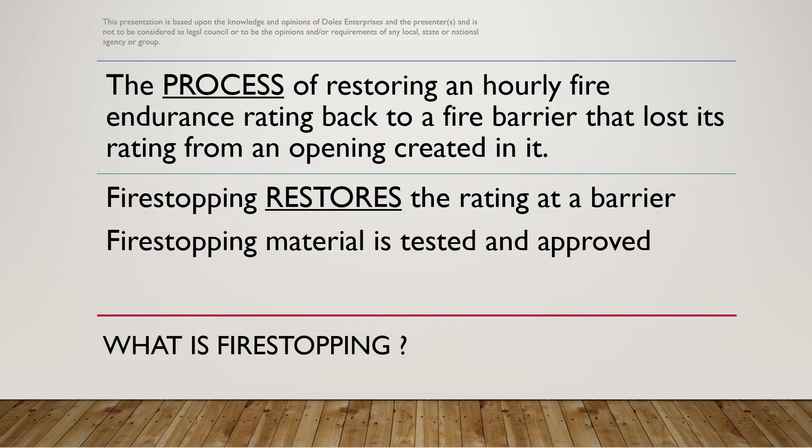The building codes have very clear requirements on passive fire protection. Fire investigative reports have shown that unprotected or improperly protected penetrations and joints cause millions of dollars in property damage and contributed to the loss of life and injuries due to the uncontrolled migration of fire, smoke, and gases. In order to promote life safety and property protection, the National Building Codes include fire testing and performance requirements for

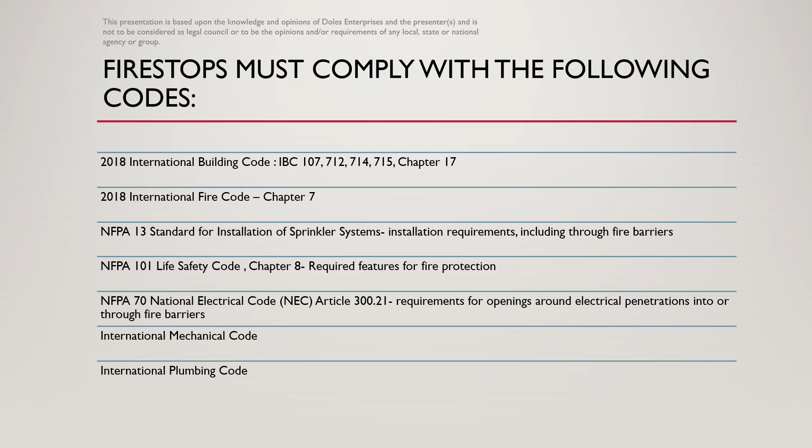penetration fire stop and fire-resistant joint systems and rated duct systems. Chapter 7 of the International Building Code provides detailed requirements for fire resistance rated construction, including structural members, walls, partitions, and horizontal assemblies. Other portions of the code describe where certain fire resistance rated elements are required. The chapter specifies how these elements are constructed, how openings in walls and partitions are protected, and how penetrations of such elements are protected.

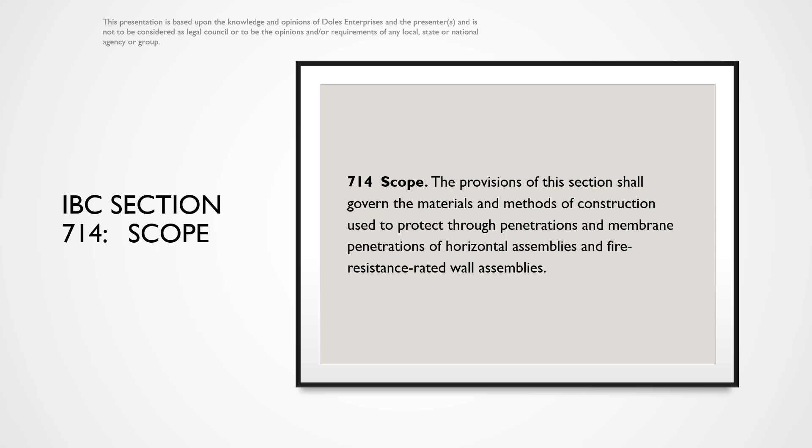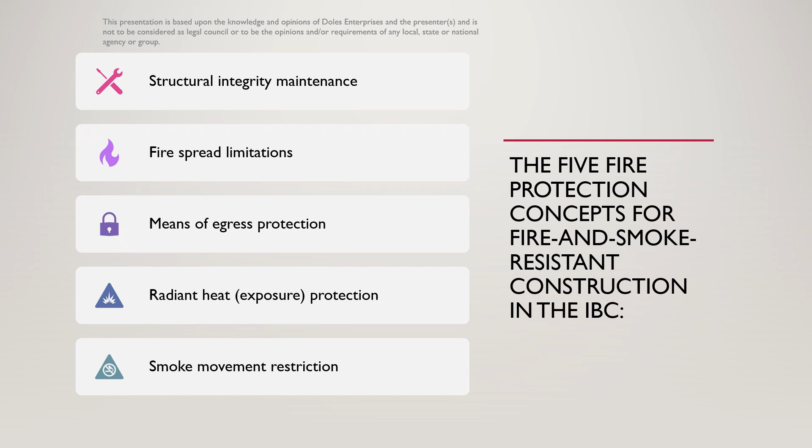The 5 fire protection concepts for fire and smoke resistance rated construction in the IBC are: structural integrity maintenance, fire spread limitations, means of egress protection, radiant heat exposure protection, and smoke movement restriction.

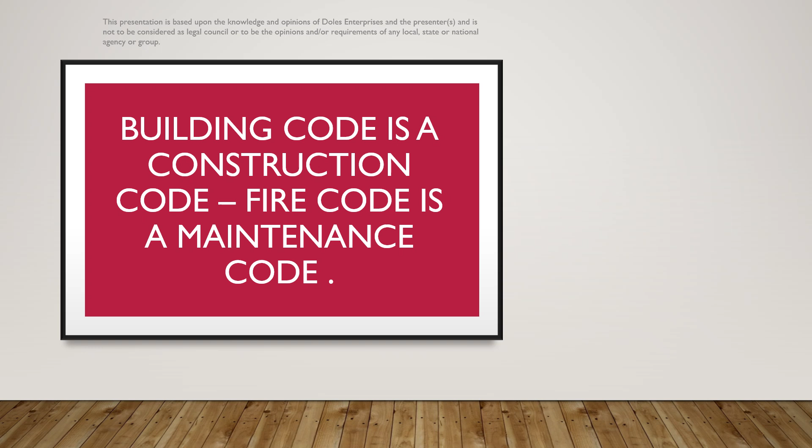Building codes control and include fire safe design and fire prevention into the construction of the building and systems that are installed. Fire codes dictate prevention on an ongoing basis beyond the period of initial design and construction. It can best be said that the building code is a construction code. The fire code is a maintenance code.

Referencing Chapter 7 of the 2018 International Fire Code, Chapter 7 provides requirements to maintain the fire resistance ratings of building elements and to limit fire spread. In 701.6, Owner's Responsibility, we read: the owner shall maintain an inventory of all required fire-resistant rated construction installed to resist the passage of smoke, and the construction included in sections 703 through 707.

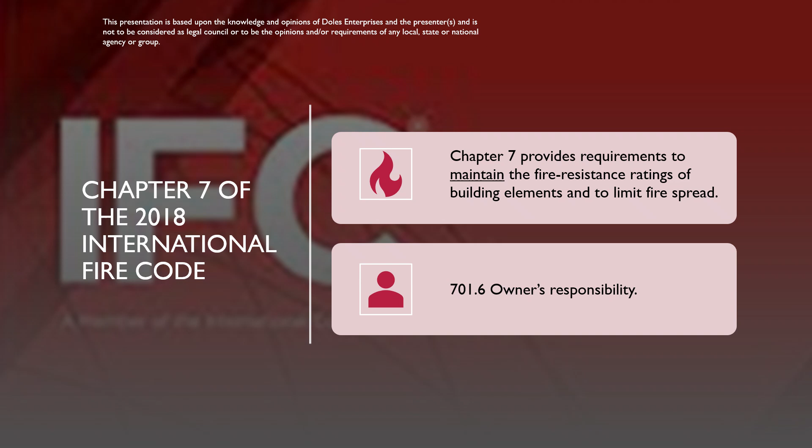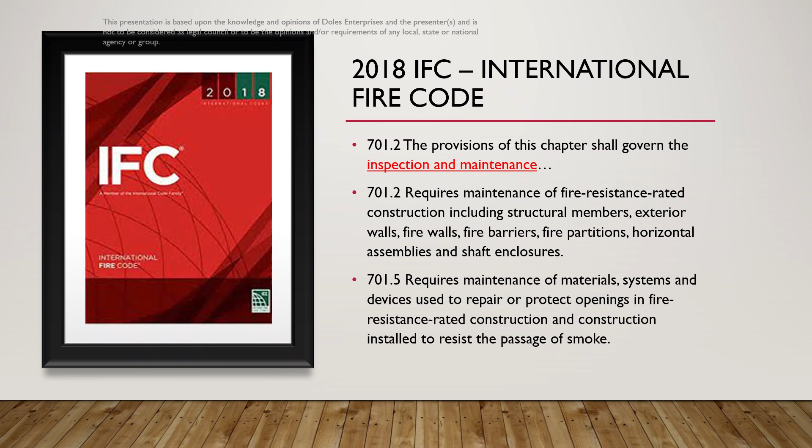Such construction shall be visually inspected by the owner annually and properly repaired, restored, or replaced where damaged, altered, breached, or penetrated. Again, referencing the IFC in 701.2, the provisions of this chapter shall govern the inspection and maintenance. Therefore, we make the statement that the fire code is a maintenance code.

Fire stopping is critically important in healthcare facilities because many occupants have limited mobility and could not easily evacuate in the event of a fire. Hospitals and other healthcare facilities that perform surgery or offer inpatient care are designed to protect occupants by a process called defend in place. By contrast, most occupants of an office building can evacuate themselves without assistance, thus the higher standard for healthcare facilities.

Healthcare facilities must be designed with additional features that protect the occupants in the event of a fire. The Joint Commission and the Centers for Medicare and Medicaid Services, the two primary agencies that regulate hospitals and healthcare facilities, require that buildings comply with the National Fire Protection Association Life Safety Code, NFPA 101, and the associated life safety chapters. Many healthcare facilities initiate a barrier management program, restricting access above ceilings to prevent unknown breaches in fire barriers. Barrier management programs are discussed in more detail in another section.

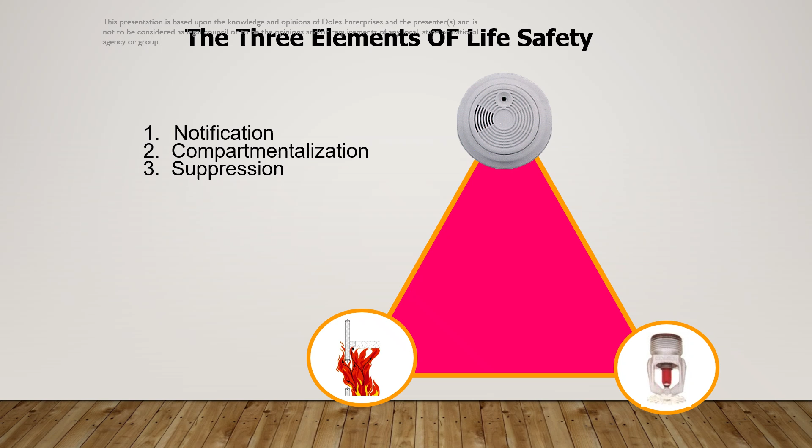National fire protection groups throughout the country have identified these 3 elements of fire and life safety: number 1, notification; 2, compartmentalization; 3, suppression.

The containment of smoke and other toxic gases during a fire is a crucial element in fire and life safety. Compartmentation is identified as a passive fire protection measure. The spread of fire can be restricted by dividing a building into separate compartments with fire-resisting walls and floors, thereby increasing the availability of escape routes for the occupants.

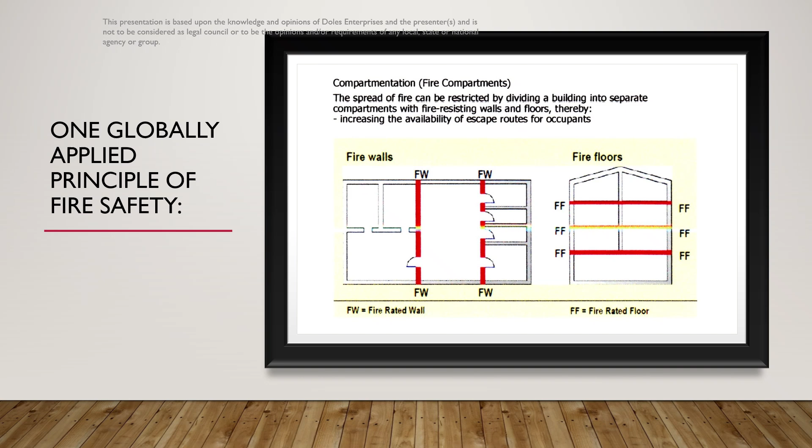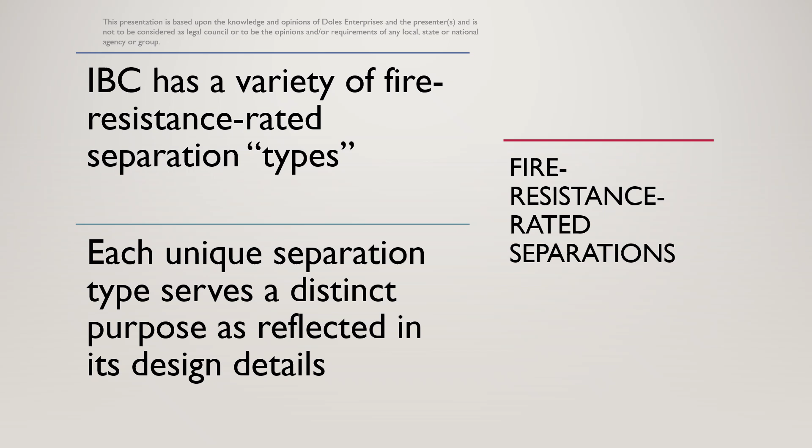The IBC lists a variety of fire resistance rated separation types. Each unique separation type serves a distinct purpose as reflected in its design detail. Fire resistance rated separations listed in the IBC include firewalls, fire barriers, fire partitions, smoke barriers, exterior walls, and horizontal assemblies.

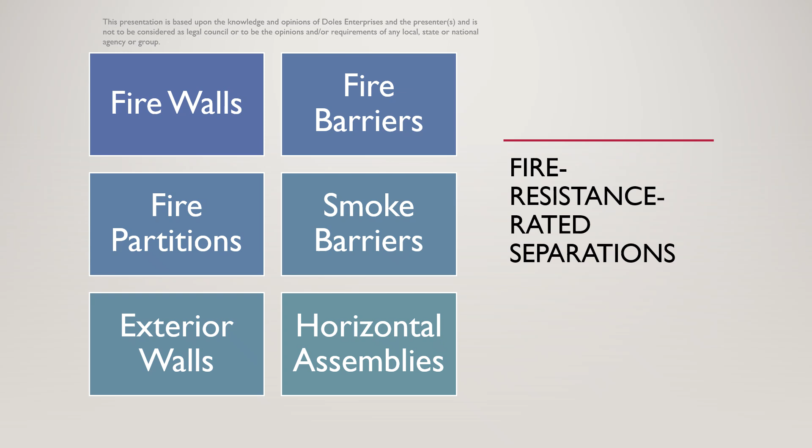Fire protection systems can be broken down into two prime categories, active and passive. An active fire suppression system includes mechanical systems that are designed to extinguish fires after they have been started, such as sprinklers. But active systems do not control propagation of smoke and gases, the leading cause of death in fires.

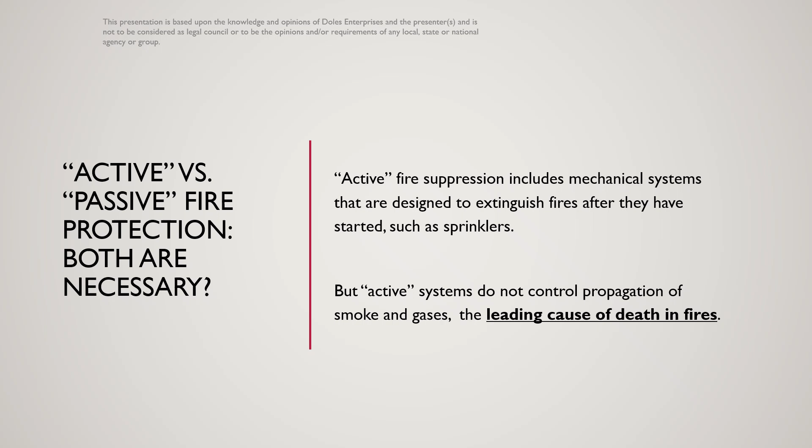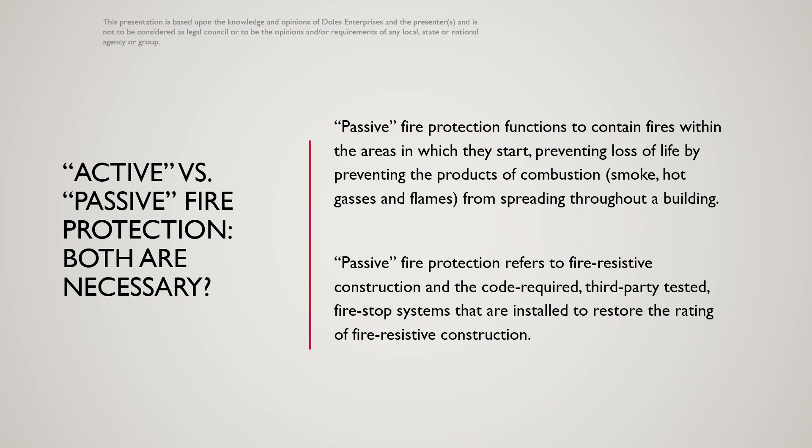Passive fire protection functions to contain fires within the area in which they start, preventing loss of life by preventing the products of combustion, smoke, hot gases, and flames from spreading throughout a building. Passive fire protection refers to fire-resistant construction and the code-required, third-party tested firestop systems installed to restore the rating of fire-resistant construction. These systems are an important part of a comprehensive, balanced approach to fire protection.

Passive fire protection focuses on containment and uses compartmentalization to prevent or slow the spread of fire from one compartment to another. Fire stops have been receiving more attention in recent years, especially from building inspectors and fire marshals. This is not surprising. Statistics show that inhalation of smoke and toxic gases accounts for 75% of all fire-related deaths, and about 57% of people killed in fires were not in the room of the fire's origin, underscoring the importance of good containment, which can only be achieved with properly installed and maintained fire-stopping systems.

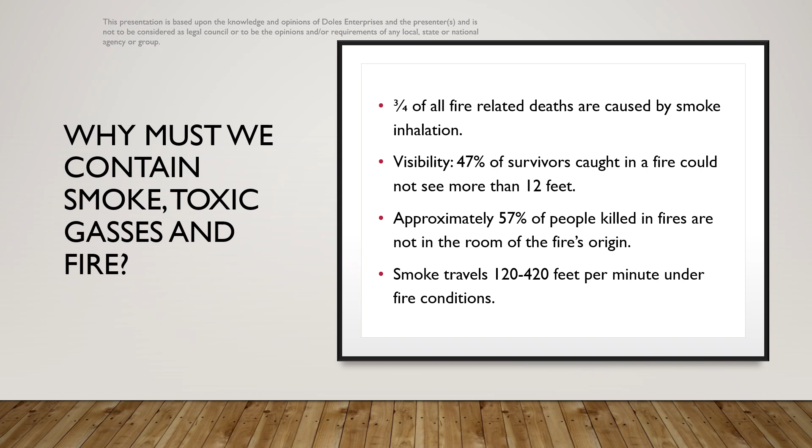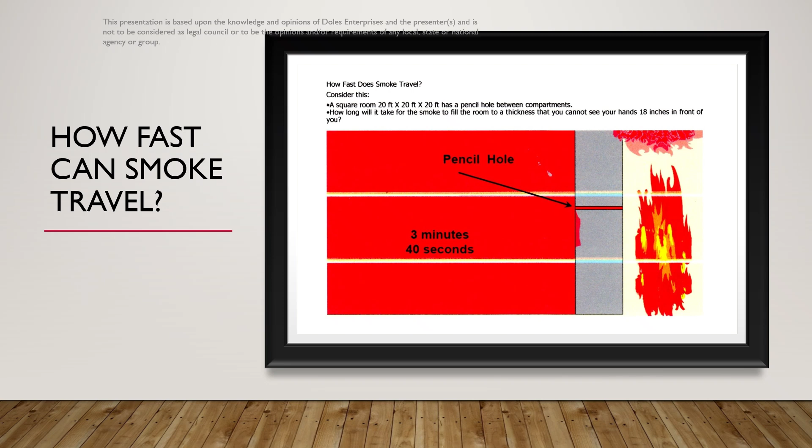There have been several major fires in history that reveal the true consequences of what happens when firewalls are neglected or fire stop systems are not properly installed.

On March 22, 1975, a fire broke out at the Browns Ferry nuclear plant when a worker tried to test material for smoke containment. It turned out the material being used for firestop was a urethane foam, which was highly combustible. The fire was put out, but this could have been a major disaster, as more than 1,600 electrical cables were damaged, affecting 628 important circuits that controlled the nuclear power plant.

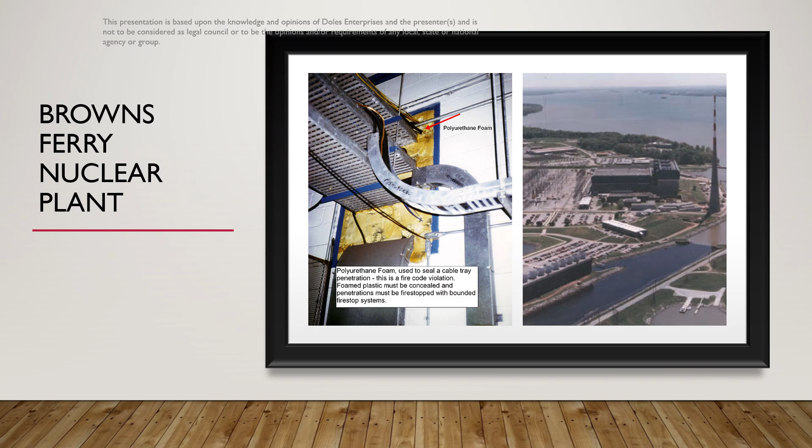On November 21, 1980, a fire broke out at the MGM Grand Hotel in Las Vegas, Nevada. It was later determined to have started from heat generated by an electrical system within a combustible concealed space. 85 people were killed in that fire and nearly 700 were injured. While the fire primarily damaged the ground floor casino and adjacent restaurants, most of the deaths were caused by smoke inhalation on the upper floors of the hotel.

One of the life safety issues was openings in the vertical shafts, stairways, elevator hoistways, and seismic joints, which allowed toxic smoke to spread throughout the building. Later newspaper articles indicated there were 83 code violations found in the building. Not more than three months after the fire, the state's building and fire codes were revised to have the most stringent fire sprinkler and life safety requirements in the country.

Fire stopping helps contain smoke and toxic gases to stop them from spreading to other areas of the building. We need to consider what fire stopping does and why it's important that penetrations are properly sealed. Fire stopping can increase the availability of escape routes for occupants and ultimately save lives.

Fire stops are a critical component of the fire protection system and are necessary to slow the spread of fire, smoke, and gases during a fire, giving occupants more time to escape.

Fire barriers can have any number of penetrations that, if not properly sealed, can compromise their fire rating and thus their ability to contain smoke, gases, and flames.

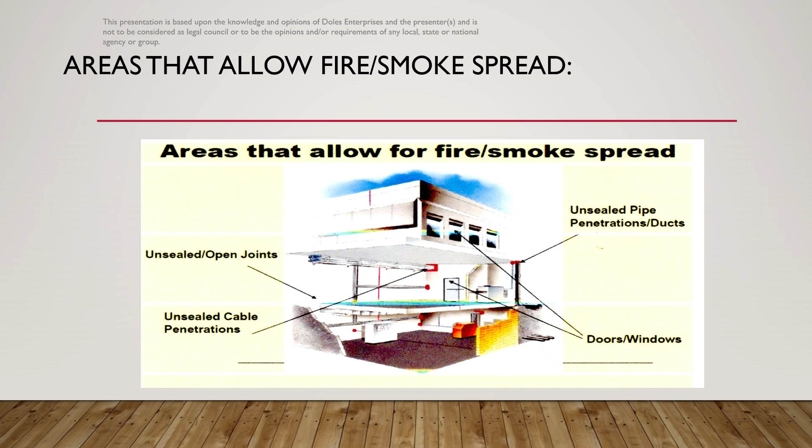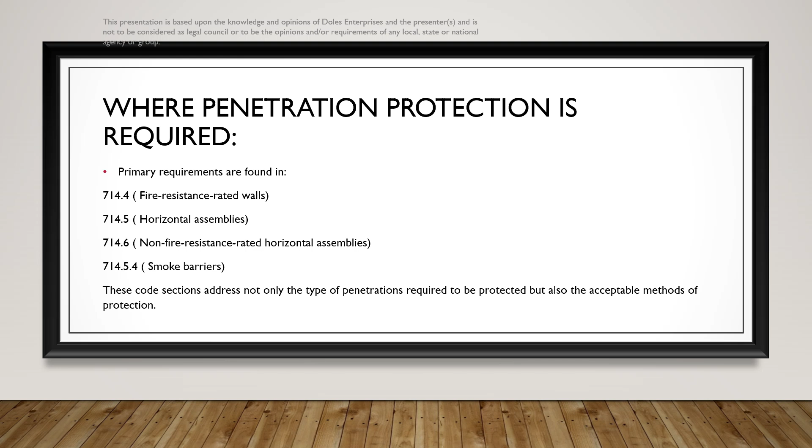Areas that require fire stopping include through penetrations, blank openings, membrane penetrations, construction joints, and perimeter fire barrier systems. Within the IBC, the areas that require fire protection are listed in 714.4, 714.5, and 714.5.4. These code sections address not only the type of penetrations required to be protected, but also the acceptable methods of protection. The fire resistance rating of the firestop system must equal the fire resistance rating of the penetrated fire-separating assembly or floor assembly in which the firestop system is installed.

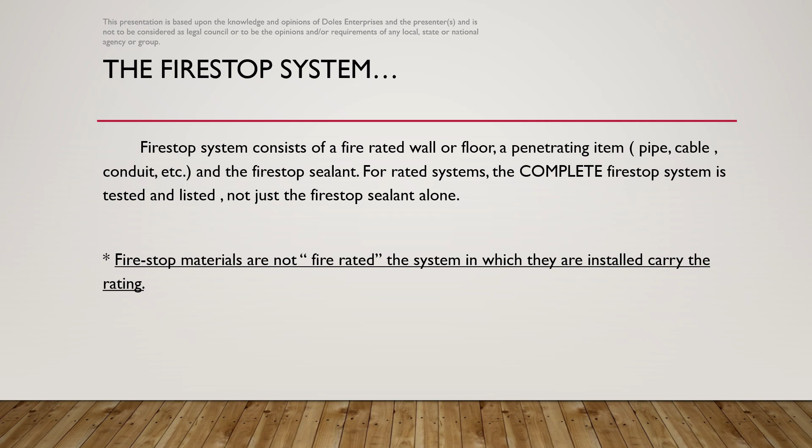With a few exceptions, the methods and materials used in the penetrations, joints, and duct enclosures are tested as a system to demonstrate they function as fire containment for the required fire resistance rating. A modification to a tested system voids the rating of that system.

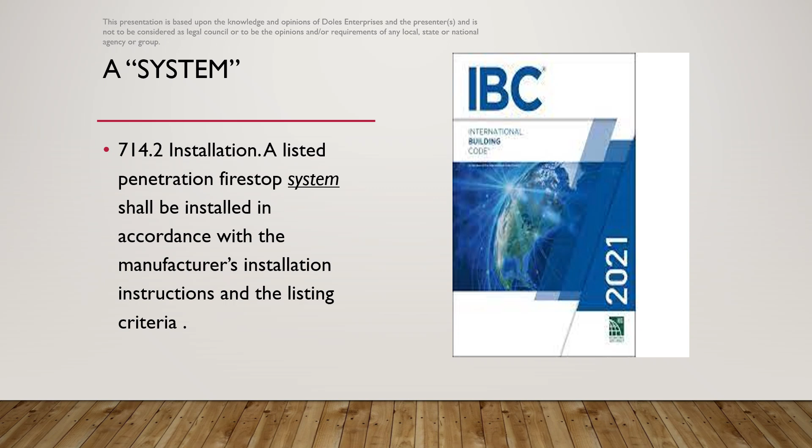The IBC requires in 714.2 that a listed penetration Firestop system shall be installed in accordance with the manufacturer's installation instructions and the listing criteria. So how do we get to these listings? Well, we have to have testing.

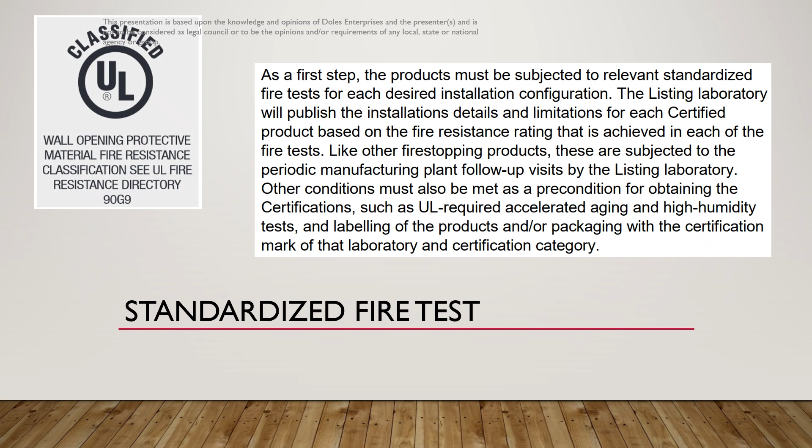As a first step, products must be subjected to relevant standardized fire tests for each desired installation configuration. The listing laboratory will publish the installation details and limitations for each certified product based on the fire resistance rating achieved in each fire test. There are several independent testing laboratories, also referred to as third-party testing agencies, which conduct the fire testing of Firestop and duct enclosure systems.

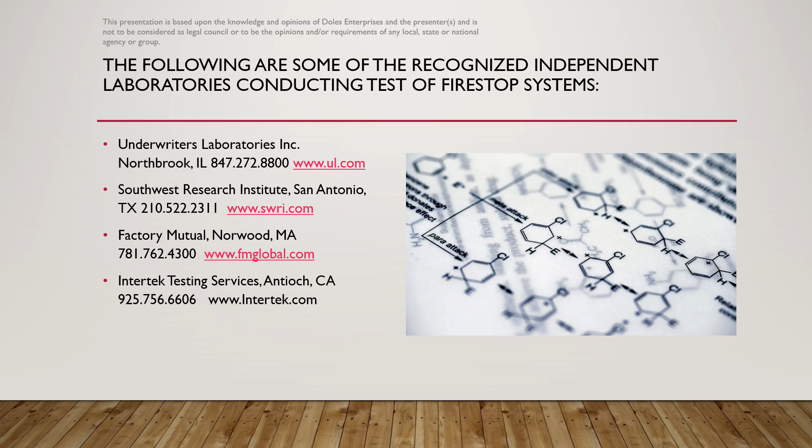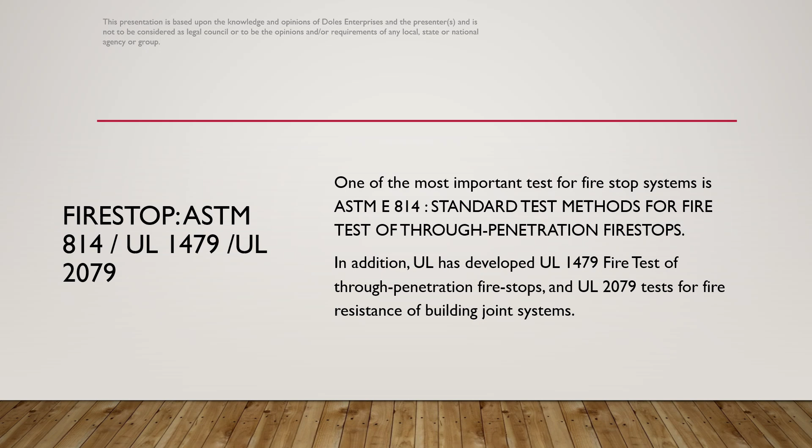One of the most important tests for Firestop systems is ASTM E814, Standard Test Methods for Fire Test of Through Penetration Firestops. In addition, UL has developed UL 1479, Fire Test of Through Penetration Firestops, and UL 2079, Test for Fire Resistance of Building Joint Systems. The fire test results are usually included as design listings in the fire resistance directories published by testing laboratories.

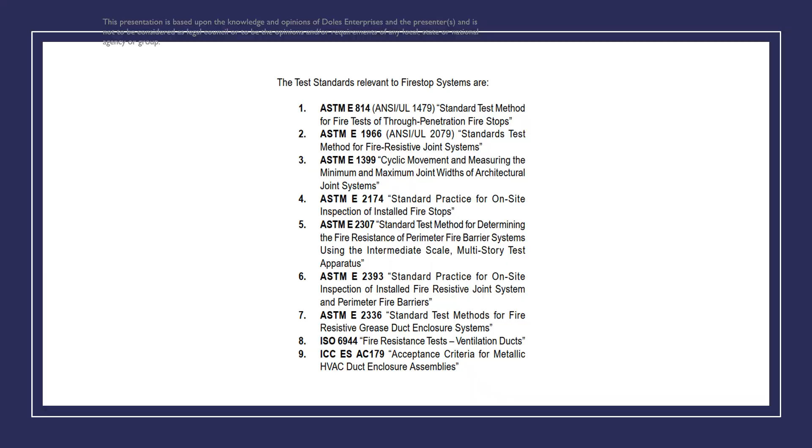Testing criteria information is typically listed on the UL system design sheet that you will receive in the field during your inspection process. Certain key elements will be identified.

Specific are the F rating, which is the rating that prohibits flame passage through the system for a duration of a fire test. The T rating is a maximum temperature rise of 325 degrees Fahrenheit above ambient on the non-fire side of the tested penetration.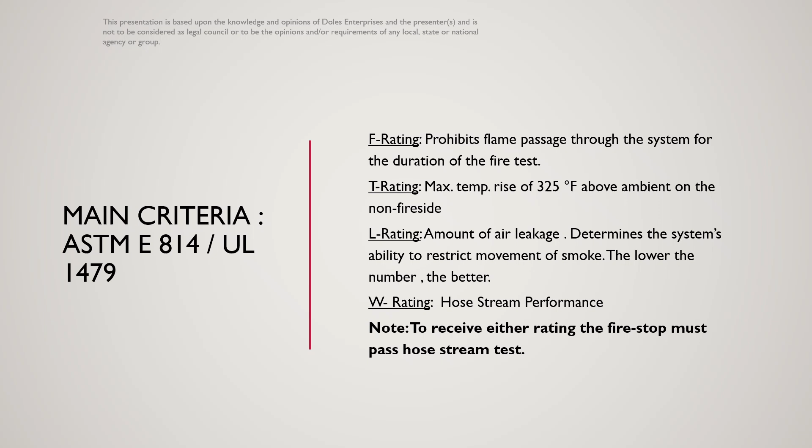The L rating concerns air leakage. The W rating is the hose stream test. All systems must undergo the hose stream test, which is usually the most difficult step in validating the performance of Firestop.

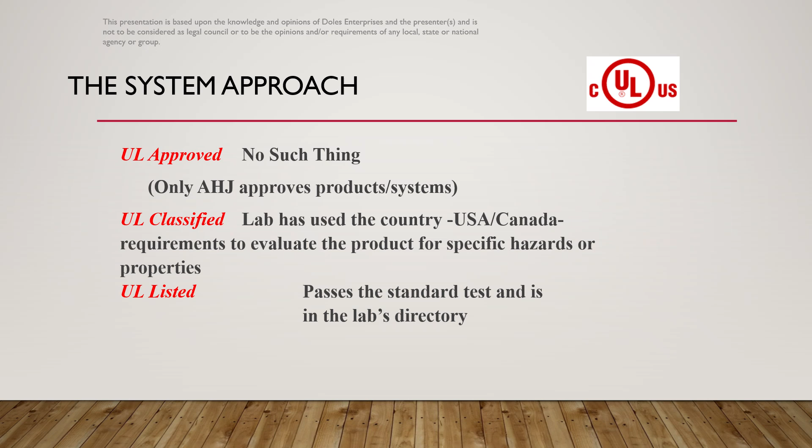A UL listed system product bears the seal of UL. Ultimately, it's the authority having jurisdiction who approves such systems. The AHJ must approve Firestop system details and Firestop products. Hence, Firestop system details and materials should be included on the plans and specifications.

Manufacturer cut sheets are often accepted if they are generated by an approved testing agency. If details, products, and specifications are not sufficient to provide clear direction to the general contractor and Firestop installer, the submittals should be noted as incomplete and returned to the designer to be resubmitted with the required information. When plans and specifications are clear and complete, most field problems with Firestop systems can be avoided.

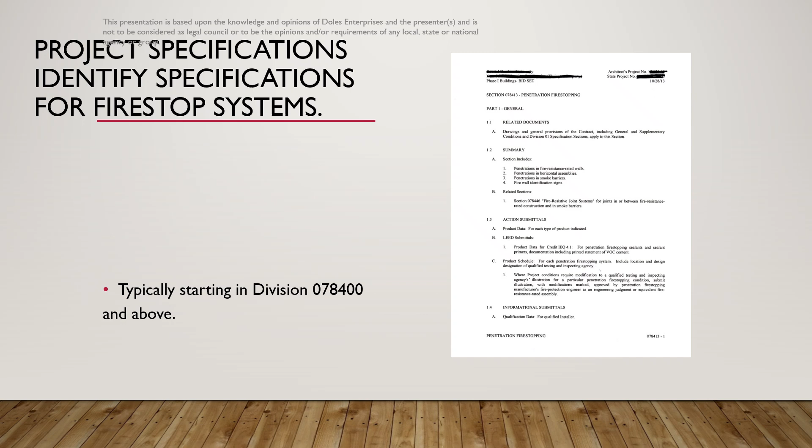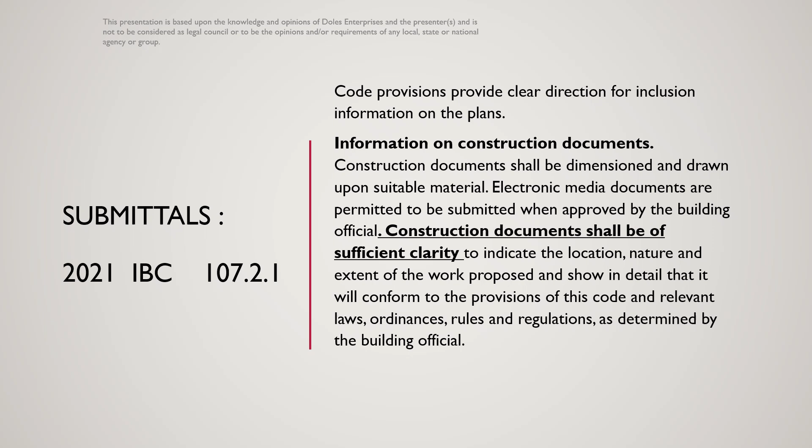The building code requires that sufficient information be provided to the building inspector to conduct required inspections. Required inspections include those on Firestop. Typically this is contained within the project submittal package and should be reviewed during plan review. As previously discussed, the building code requires in Chapter 1 that sufficient information be provided to conduct necessary inspections, including information concerning Firestop.

The pre-construction meeting is the perfect opportunity to initiate discussion on the coordination of work among the trades, the general contractor, and the inspectors. This is important since the application of Firestop protection systems is affected by the work of many trades. An early discussion of who is responsible for restoring the fire resistance ratings will eliminate aggravation and expense later in the construction process.

The pre-construction meeting should also be used to agree upon all the penetrations to be protected, to schedule the trades to work with the Firestop installers, schedule Firestop inspections accordingly, and agree on whether the building or fire inspector will be conducting the inspections.

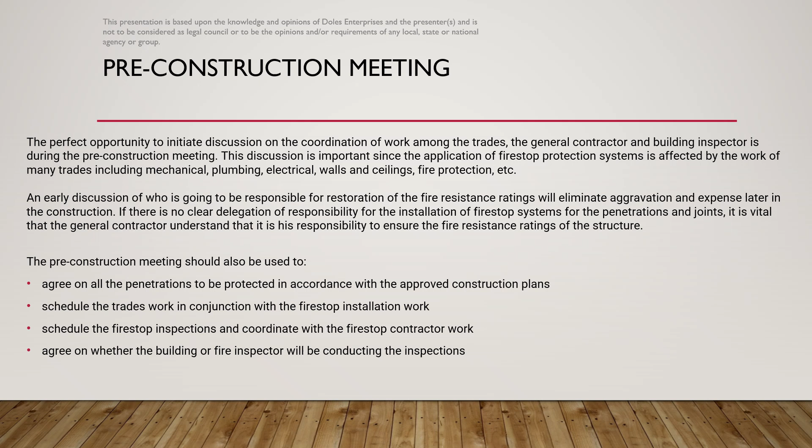This concludes this section of the training on Firestop. Remember, there were five different sessions. I ask that you go through each one.